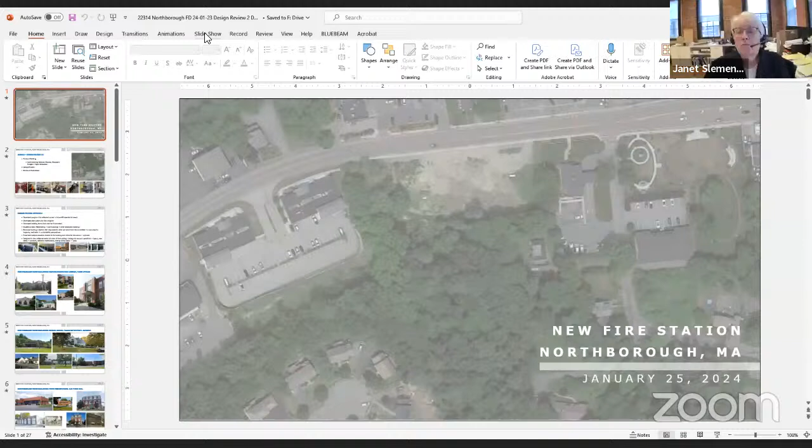Amy, you're muted. I'm sorry, can you hear me now? Yes, we can. Thanks. Okay. And you can see my screen, okay? Yes, okay, thanks.

Okay, so I'll try to go through this fast as I know you have a lot of comments that you wanted to get to. This was just sort of an agenda for the meeting. I'm just going to quickly go through where we are in the process, and then we can review the submission that we sent to you. The design approach that we've taken with the building committee, the first step we had was to develop a program.

We sent out detailed questionnaires to the fire department, and we had a number of firefighters respond, which was great and really gave us a lot of good data to work with as we developed the program.

We met with them, toured the station, and went in depth in our conversations about their operational needs, both for current firefighting and looking out 40 years to what they might expect they'd need. That was used to develop the program for the building.

From that, we developed several different plan options for how that program might be developed. We reviewed those with the department and the committee, talked about the pros and cons and what would meet operational needs, and wound up with the option we're going to show you today, which best met the operational needs for the fire department.

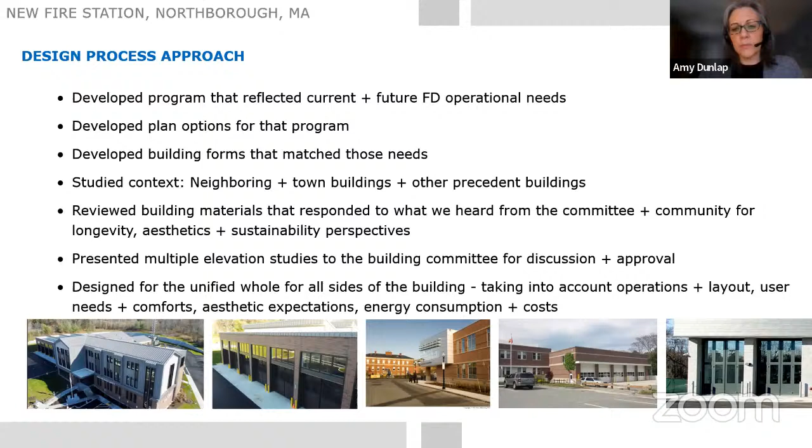When we design, we really try to design for a unified whole of the building. We look into all sides of the building. We don't just have a facade in front and then wrap the building with something else in the back. We want to make sure it's a unified design that represents the operational needs of the fire department, provides the comforts firefighters deserve, meets all aesthetic expectations, and contributes to the energy goals for the building.

These we looked at with the design review committee previously in the joint meeting. We looked at precedent studies for a number of buildings around the town.

The public buildings we looked at were the library, which has some beautiful old arches in the front and an addition in back that's a very sympathetic modern addition to the historic library. The town office building has some lovely Art Deco details with a curving canopy and light fixtures. Other town buildings we looked at include the schools.

I'm just going to grab my laser pointer so we can point to some things as we talk. Some gentle arching canopies, some semicircular arches in the police station. We looked at pitched roofs and flat roofs, all represented on buildings in your community. We looked at window patterns with large openings and smaller openings above them, and building trim dividing the window patterns, all as precedents as we developed our design.

Other town buildings we looked at were the existing and the old fire station and the old town hall building, and industrial and commercial buildings around town were other precedents we looked at.

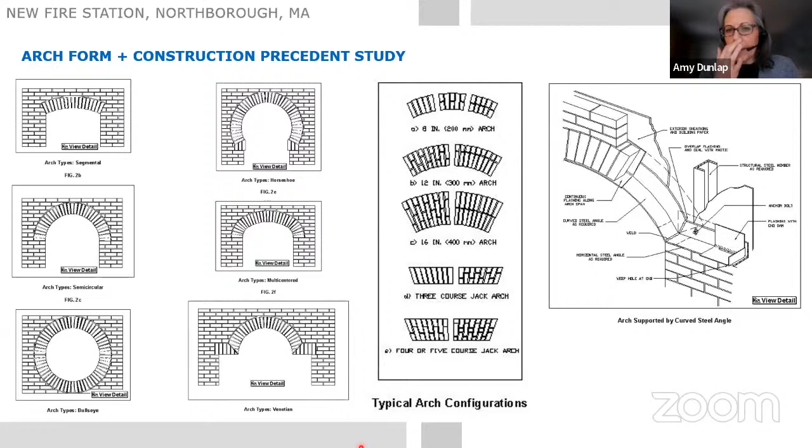As we started developing the design, there was a lot of interest in incorporating arches, both from the community and from the committee. We spent time looking at various arches and construction techniques and what that would mean for a building constructed the way we propose. We looked at segmental arches, semicircular arches, multi-centered arches, and lots of different arch types. We looked at how the construction would be accomplished with steel framing supporting the masonry and looked at different flashing methods, and we'll continue to do that as we move forward with the design.

When we presented the first round of designs to the committee and started looking at these masonry products and arches, there was a lot of discussion about H.H. Richardson, a prominent American architect in the 1800s. He was the architect of Trinity Church in Boston and did lots of public architecture throughout New England, including many libraries, just a few being Ames Library in North Easton, Winn Library in Woburn, and Converse Library in Malden.

There was a suggestion that we look at H.H. Richardson for inspiration. A lot of his buildings feature prominent arches marking the main entrance. So we looked at those, and he had other arches used to highlight other things. You can see semicircular arches at main entrances, and segmental grand arches shown in other places, as well as other arch designs he used. We looked at all of that for inspiration.

We looked at the way he used different masonry products, the way he used banding courses to tie together different elements of the building, and the way he used window patterns. The windows really reflect the functions going on beyond them, so it's not the same window pattern repeated across the building. Windows are grouped together and reflect what's happening in the spaces beyond and the functions back there, so you see small windows at the top of the building and larger windows depending on what's happening behind.

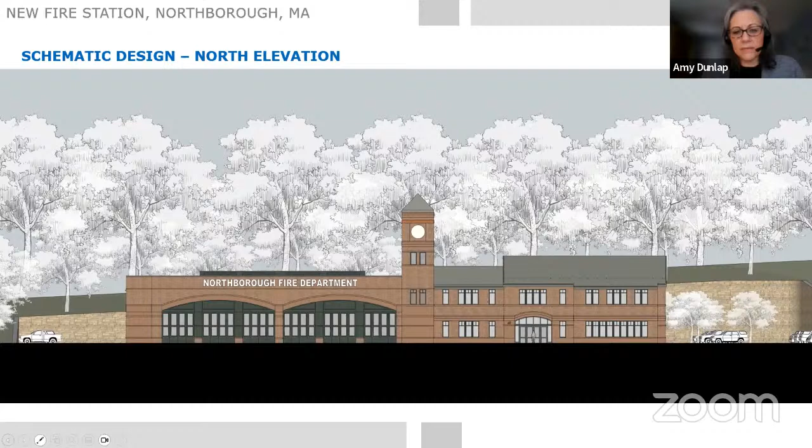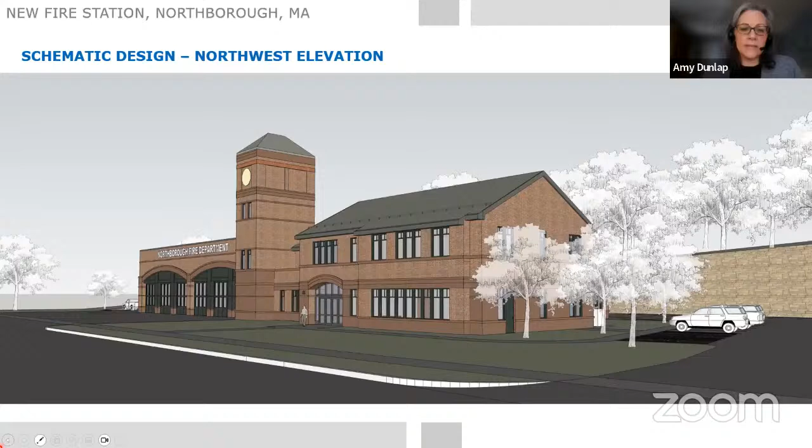We have pitched roofs over the administrative wing, and then we're proposing a flat roof over the apparatus bays with roof monitors. Pitched roof monitors would be over that flat roof. Those would have a vertical surface of glass that would allow natural light deep into the apparatus bays, and then the sloped roof surface could be used for solar panels.

This is the view of West Main Street with some of the neighboring building masses shown for reference. You can see the retaining wall behind the building and then the bank and other buildings around.

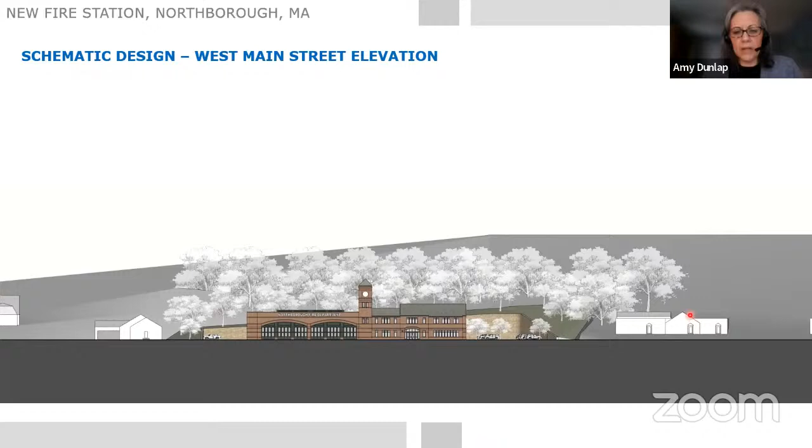For the south elevation, this is the elevation that faces the parking area. We continue the banding and the different masonry products. We continue the window patterns. For the apparatus bays, we were proposing not incorporating the arches on the back side of the building simply due to cost considerations, but that's something we can continue to discuss.

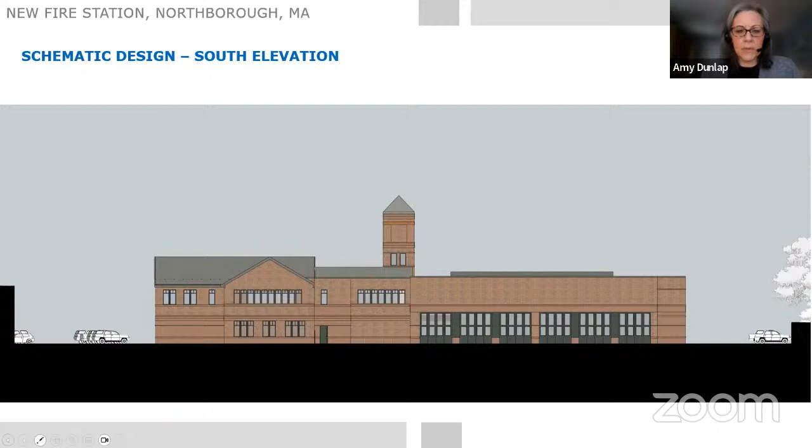So where we are in the process right now, our next meeting with the building committee is to approve the schematic design so that we can send that to a cost estimator. The cost estimate will then take several weeks to produce, and we hope to present a schematic cost estimate to the committee at the end of February.

We still have more design review meetings with you to continue and address any issues noted today. And then we'll need to be going to the zoning board and the planning board. And we have plans for an additional community information session moving forward.

That is the end of my presentation.

Thank you so much. That was great.

The way we go forth after this in our meetings is I'm going to reach out to staff. I know Lori, you sent out a letter yesterday with a checklist of about 15 items. Usually the applicant will look at those and decide if they want to follow them or ask for a waiver. Is there anything you'd like to mention, Lori, or they just got it so they can come back to us at the next meeting?

The only thing I'm curious about is actually two things. One is, could you point out on the schematic where the rooftop solar panels would be possible? And the second thing is, I know you mentioned the possibility of having some sort of vines cascading down from the retaining wall. Have you also given thought to maybe terracing at the highest point to break up the mass?

I'm going to address the second thing first, if that's okay. On the terracing, Nicole Capistran from PARG might also be able to respond to this, but I know she has been talking to the manufacturer of the segmental retaining wall about possibly terracing. One of the issues we're hearing from the manufacturer is that as you terrace, sometimes the height needs to actually increase in the wall, both because the grades are steeper as we go back into that hill, but also for structural reasons. So we are talking to them about the possibility and we're going to certainly look at it, but it's a question of whether the wall is going to get considerably taller if we do the terracing rather than just having the straight wall. Something we need to investigate more.

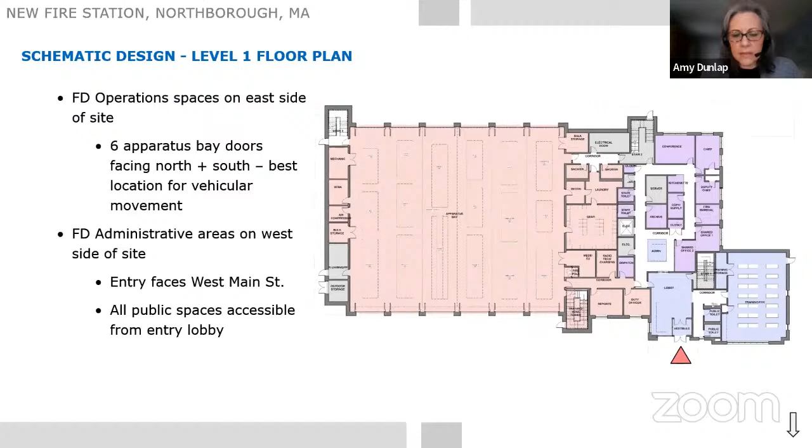For the solar panels, I don't have a roof plan here to show you, so I'm going to try to find the best image to give you a sense of what we're proposing. Right now, over the apparatus bays, there are 3 roof monitors, and each of those roof monitors has a sloped roof that faces south, so we were proposing putting solar panels there.

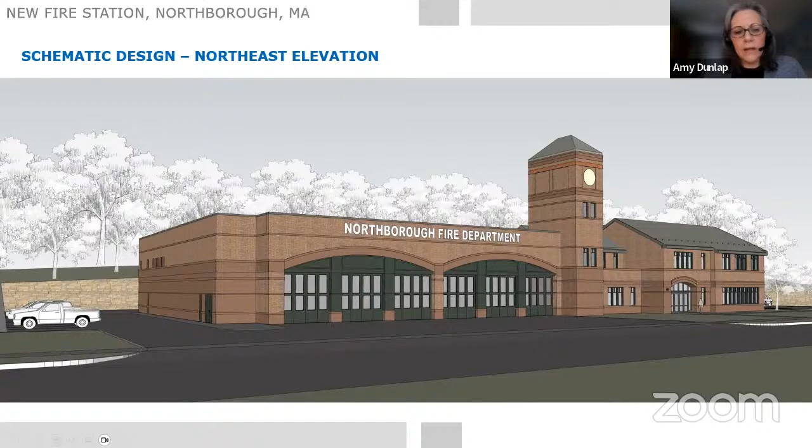The other opportunities for solar panels would be on the south face of the sloping roofs. Certainly, we could look at putting solar panels on this sloping roof.

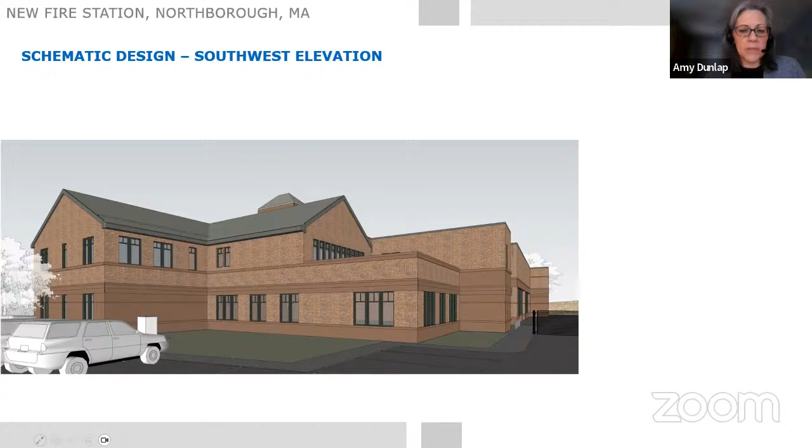We have not done a solar study yet, but we can do a solar study and really look at what would be the most effective locations, and whether it would be effective to put solar panels on this roof or on the opposite side. That's something that really needs to be done, but there are definitely opportunities for solar panels in various locations.

Amy, if you show the view looking from the east, you can actually see the monitors. I think you had it up before. There you go. Yep, right there. Thank you, okay, right there.

All right, thank you very much for the planning board submittal. Hopefully that will be firmed up a little bit more, and I would be curious as to what size solar installation you can accommodate on the roof.

And if you could actually put that in the context of the expected use of electricity for this particular property, so whether there would be like a net gain or a deficit between the expected use versus the power that will be generated. And of course, I understand it's seasonal and also depends upon the weather, but if you could base it on an annual basis, that would be helpful.

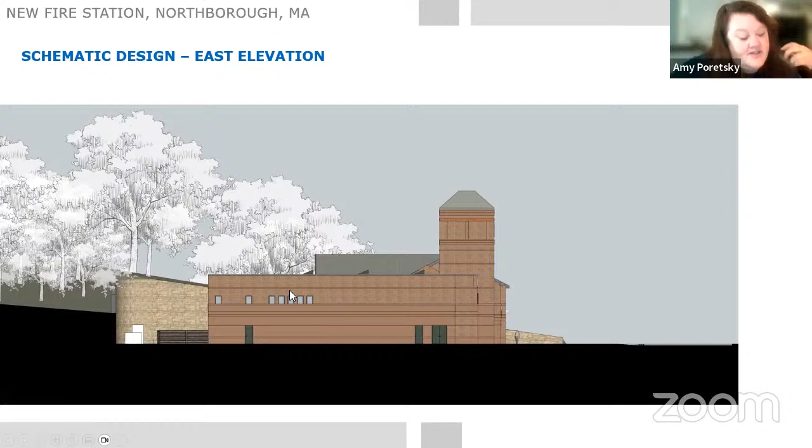Okay, thanks, Lori. I'm going to open it up to comments from the design review. While we have Dave, I was going to start with landscaping. And can you show the landscaping while you have your screen up?

Sure, I had some quick questions, so I hope you don't mind if I start.

Okay, what I noticed when looking at the site plan is the plantings shown along the border right there. All those plantings are within the swales, the drainage swales. So I was wondering what type of plantings you'd be using, because the trees and shrubs would block up the drainage swales.

We'll have that resolved for the next meeting. We will plant appropriate plants based on the hydrology of the site. This was just sort of a schematic to show that we're revegetating the area where there will be significant grading, so hopefully some of the plantings will be outside of the drainage swales.

Also, this has to do with the stormwater treatment area. Have you guys looked into that? Is that a retention basin, or what is that going to look like?

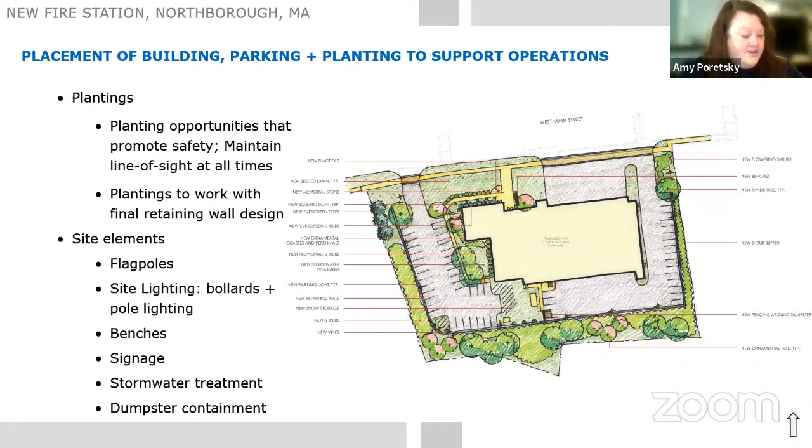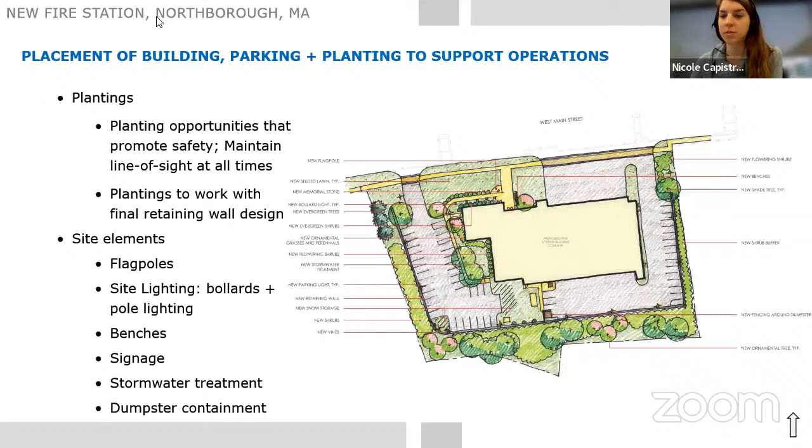All right, I'm going to start in with some of the site plan questions now that I had. Starting on page C300, the first page, there are two dark lines in the driveways near the street. Can you tell me what those lines represent? Just didn't know if they were setbacks, or for a crosswalk. Oh, they're crosswalks.

Yep, okay. Also, I understand they're schematic designs, but at the next meeting we get a plan that shows dimensions of the buildings - width, depth, height. I guess there was some elevations, but nothing about the width and depth of the building. And I can see the east setback is 57 feet, but there was no number for the west side setback.

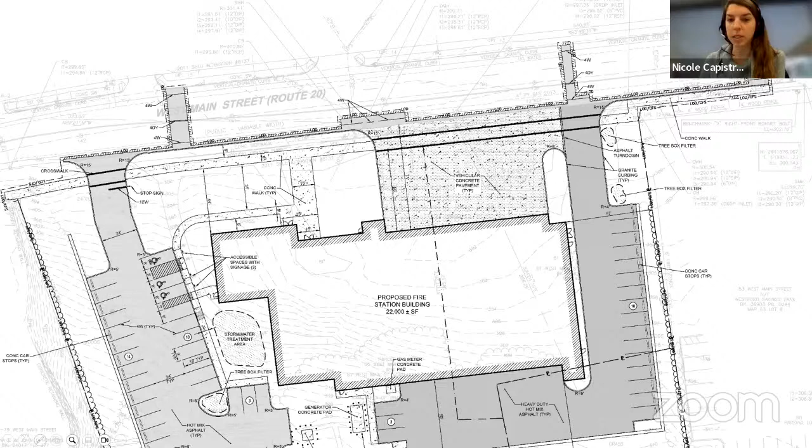How far back is the apparatus bay from the street? I'm not sure if you can zoom in, Amy, but it's 71 feet from the edge of pavement. The property line is further in from the existing, so that's where you're getting that 56-foot setback from the property line, and that 71-foot setback is from the edge of pavement.

Yeah, I saw those numbers, I was just curious where the numbers were from. And the width of the building, that's about 230 feet - is that what you guys had said before? Marc, do you have that? I think that was about right.

Give me one minute here.

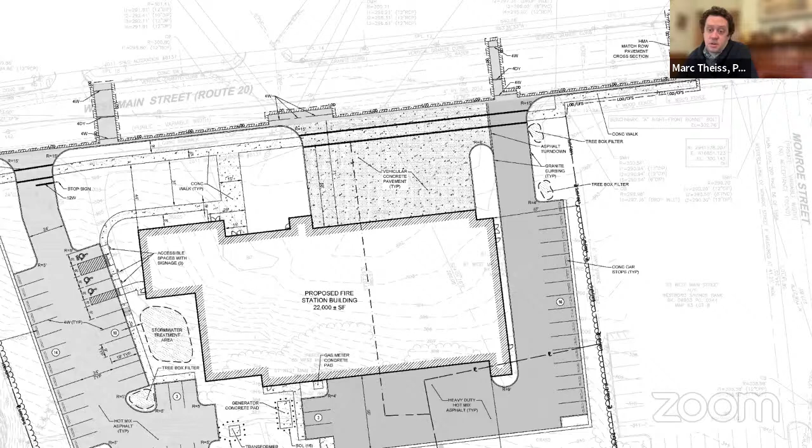Yeah, from our site plan, I'm seeing about 230, approximately 230 feet long. Okay, so the width is pretty long.

With the confines and size of the site, I really thought the 2-story or 3-story building where they built up was a good way to do the building. But I understand that the building committee has favored this 1-story with the second floor for the dormitory.

With that 1-story, does that leave less room for expansion? Because now you're surrounded by a wall. And say they ever wanted to expand to add a police, public safety type building, or any type of expansion, you're pretty much going to be held to this footprint with the wall around the outside.

Yeah, so when we looked at the design of the building, we looked 40 years out. Those were the conversations we had with the fire department. They looked at their projected staffing and equipment and operations, and we designed the building to accommodate those operations looking 40 years out. We didn't have conversations about adding a police station onto the building in the future. That really wasn't part of our discussion.

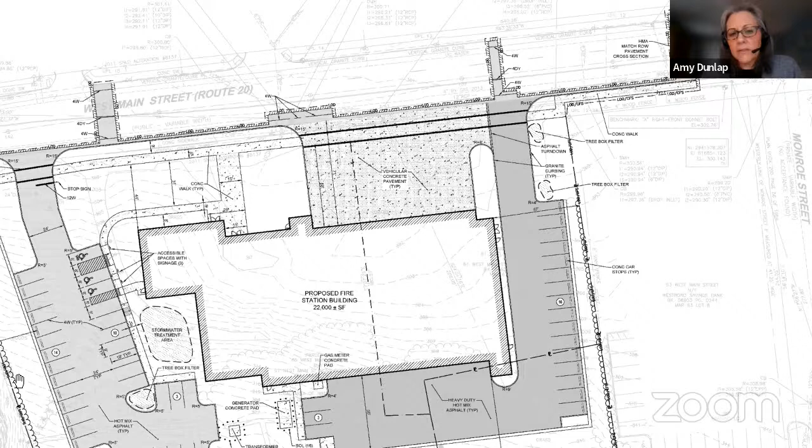Even with the 3-story scheme, I don't think you would have room to add on without building up into the hillside. So there could be the possibility of building a second building up into the hillside, but we have not looked at that.

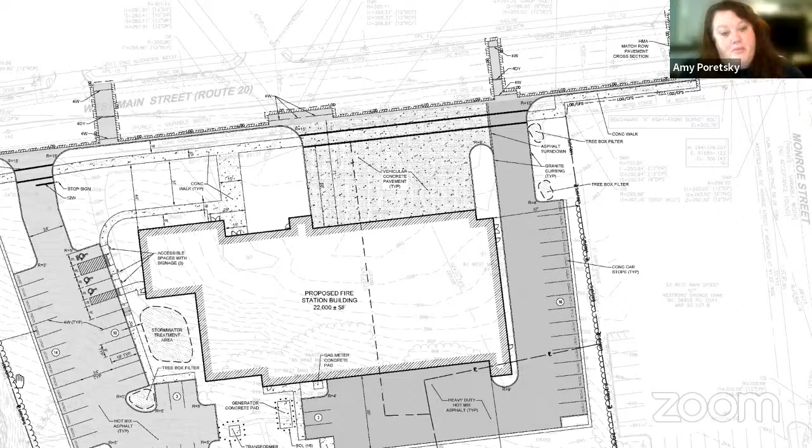Okay, well 3 people so far have mentioned moving the training room into a lower level, not below the apparatus bay, but below the admin side of the building. Is that something that would be possible to try to save space on the west side of the building, which would give more room for snow storage and also might be able to move the parking and save wall space on the back?

I can speak to that from an operations point of view. Putting a training room below ground is not really optimal. Now you're in a training room with no windows. You have egress issues. If we have 75 people in there, now we have to set up a second way of egress. It really does not benefit us or the community to bury that.

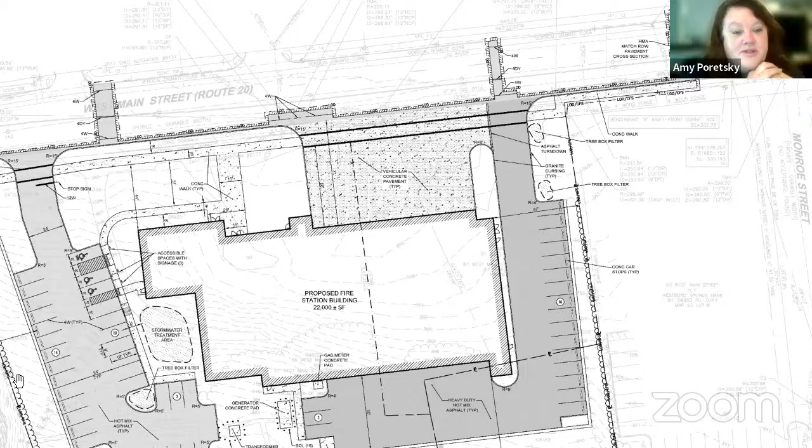No, there are a lot of community training rooms and conference rooms, so I didn't know how much this was really going to be used for the community. If the fire station is going to be well over $600 per square foot, I would think this would be based on fire station needs mostly. I don't know, I think you guys were talking about FEMA and MEMA, and a lot of times they have bunkers, so I didn't know if it made sense to put some of it on the lower level to try to save room on this space.

Yeah, it's an interesting comment. MEMA actually does have a bunker in Framingham, and they have tried numerous times to get out of that bunker and make it just a regular building up and out. They haven't had any luck with that.

So I see Bob had his hand raised. I don't know if he had a comment about the basement.

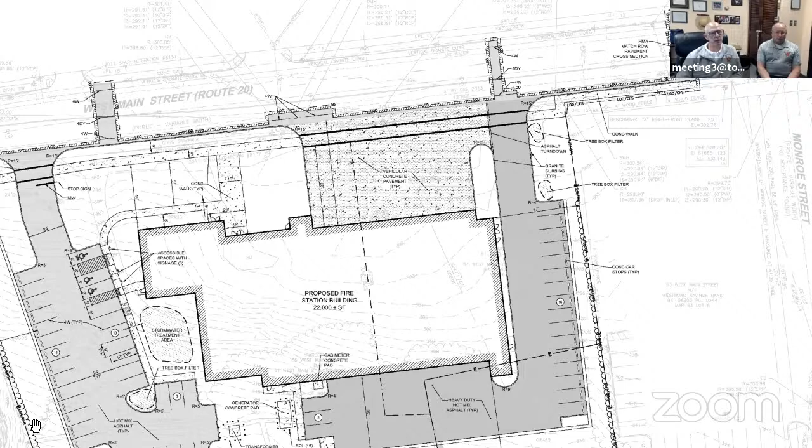Yeah, if I could, Amy. One of the things, aside from operational standpoints, if you go subgrade, you have to make that handicapped accessible. So you're increasing costs with at least one additional stairway, and the elevator has to go all the way to the bottom.

Just a side note, when Grafton built their fire station, I was vice chairman of the building committee at that point. The question arose about the training room or conference room - how often does that get used? It gets used all the time, and also by scouts and things like that. One of the things Grafton does is in the event of a big emergency where the emergency director has to start running the town, that room is key to providing space for all the other people and components that need to operate the town in the event of a disaster.

And you want that at grade level. In addition, your HVAC going underground is going to create issues as well, both in terms of heating and cooling, but also in terms of dehumidification and mold. You really want to keep the water out of there.

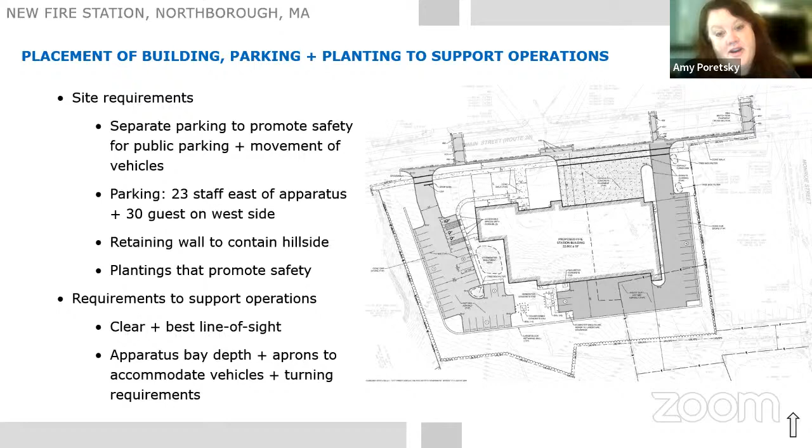Also, the parking lot before wasn't going around the back. So the parking lot right now for the public ended, and now it's wrapping around the back, which also is taking up space and pushing the wall back. I just wanted to note that. I had thought if the training room went underneath and the parking lot in the back went away, then you would have less of a need for a wall.

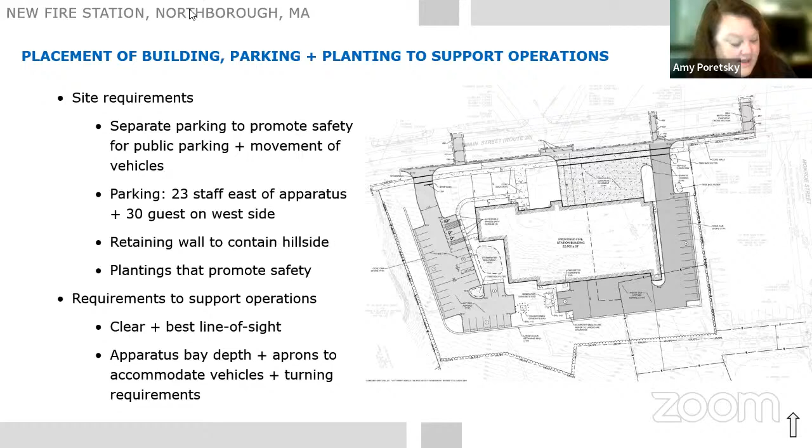Also, one other thing - would you look at Kalwall versus the roof monitors? Kalwall could be more affordable and might not have as many areas where it can leak. It's been used for a lot of years, and I actually have a picture. I could share my screen if people don't know what Kalwall is. Do you mind stopping sharing and I'll show a picture? Sure.

Okay. Let me just get it to the right page. Okay, so Kalwall, can everybody see my screen?

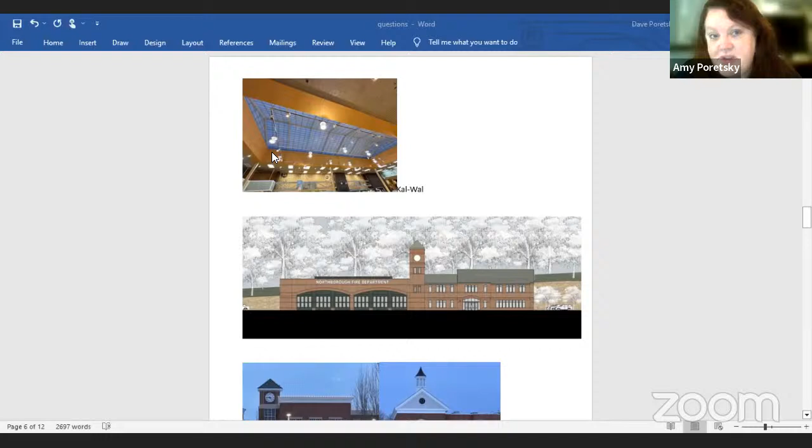Yes, so Kalwall is like a really big skylight. This is Roche Bros. in Westborough. Next time you go to Roche Bros. in Westborough, look up when you're in the vegetable section - their whole roof there is made out of Kalwall, and it lets the lighting in. I didn't know if that would be something they would be looking at along with the roof monitors, because it sounds like the roof monitors have to be built specifically for the building, and there might be more chances for maintenance issues.

Yeah, we are looking at different glazing products right now for the roof monitors. We don't tend to use Kalwall, honestly. Kalwall is a brand name, it's a fiberglass panel product. A lot of the fiberglass panel products do have issues over time with yellowing and really decreasing the amount of natural light that gets into the space over time.

One of the challenges we have with a public building under Massachusetts public bid laws is that we have to have three equal products that we specify for every product we incorporate into the building. So it's one of the challenges as we look at both the retaining wall and something like this - we can't say we're going to use this one particular product. We have to make sure there are other products we can specify that would be just as acceptable for the building. There are polycarbonate glazing systems we have used in this application before, which are very similar.

They create the diffuse light you see, similar to what you're showing with Kalwall here. They're also a very durable product and offer high insulation values, so we're looking at all of that right now. We have a new energy code in Massachusetts, so any products we put into the building have to contribute to the overall energy efficiency in order to meet the requirements of the energy code. All of that's what we're investigating right now as we move through schematic design. Okay, thank you.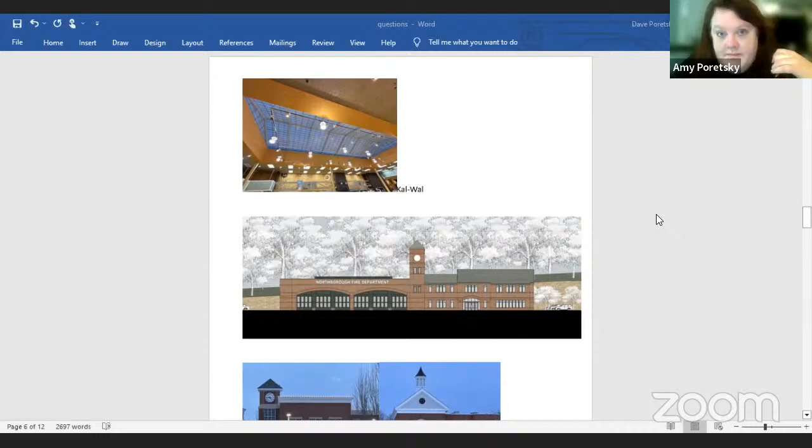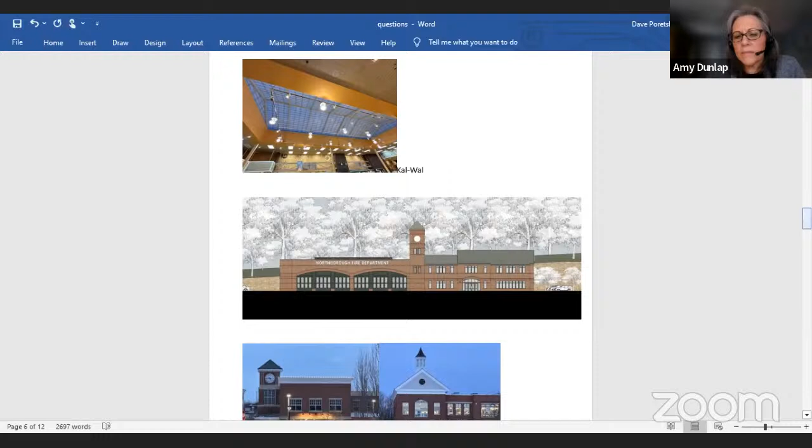In my opinion, I would keep it the same as the brick, because that wall there - the way we're looking at the picture now, it looks like those doors are set back, but they're not, right? That's all the same facade, the same scale on the front. No, the intent is to set them back some. We have not detailed that yet and figured out exactly how it's going to be constructed, so the plan doesn't reflect the setback, but the intent is for those to be set back a little.

This is a picture I had shared. I would still like to go back and see the 6 arches. I feel it looks more classic. The 2 arches is more of a contemporary look, an expression of the arches, and here there's no green, black materials. I feel it's a more classic look to keep the brick, and I like the red doors. I know people have said it's busy, but Natick has 5, and this is another one with red doors and 5 arches.

I think there's a way you could do it with the arches, and I'd stay away from the green black material. Actually, when I was looking up the landscape architect, it came up with his location on Google, and here's a building across the street from his office. Look, there's like 24 arches on that building.

So I just feel the arches could still be done. I'd like to know if at the next meeting you could bring up an example of what it would look like. Here's one you had brought before, with the brick and the arches. I still think it's a great, classic look for the downtown. This is a chance, this is going to be the showcase building in the new downtown, and it'd be great to have a nice classic look.

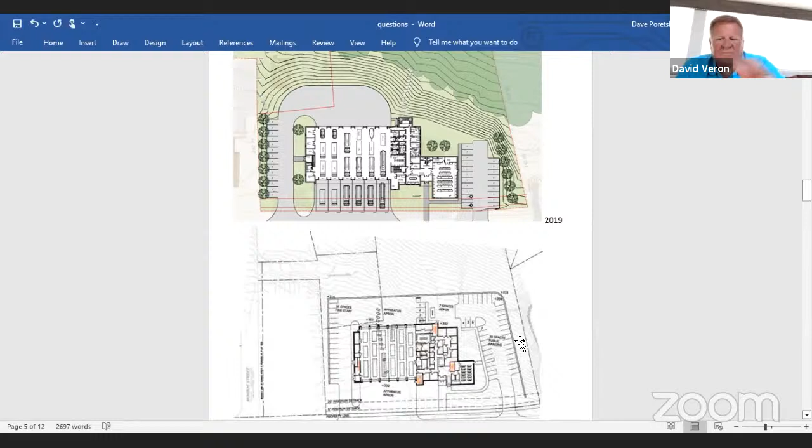I still think you can keep what you have for parking and just kind of play with the wall and how it's being played with a little bit. Just kind of play with it.

As the chief said, there was no site survey done in 2019. They were just looking - we weren't the architects at that time. I don't know exactly what they were looking at, but I imagine they were looking at GIS, which doesn't have the most accurate data sometimes. So we got a site survey, and the grades were a little different than what was expected. We did some more in-depth programming, looked at constructability and all, and that's how the footprint changed and the parking layout and the wall design changed.

So it's just, as the chief said, a different point in time with different levels of information that were available. I think if that design had progressed, and once they had discovered or completed site survey work, they would have discovered that there was an issue and that they probably would have ended up with a retaining wall as well. The building grew though, like I said before, like 4,000 square feet too.

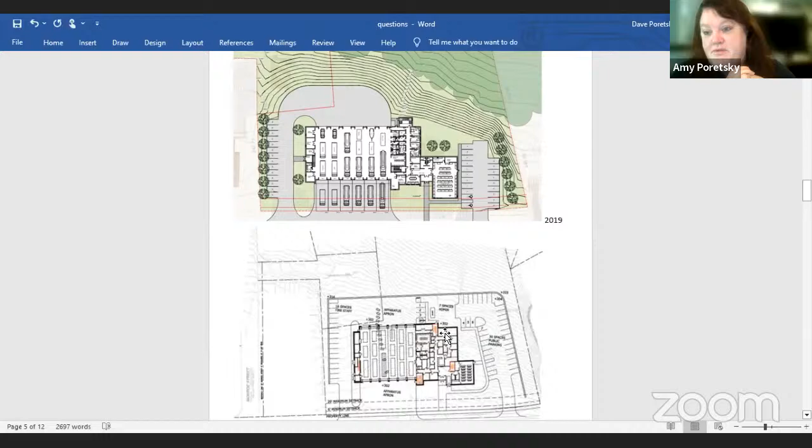The internal workings, I have no problem with whatever you need for that type of functionality of your building. But I do think the outside is important, and the way that it looks is important. And I want to see it from an elevation where I want to see the plantings coming out from the front door. I want to see how this is all going to actually look next to the two buildings next to it, next to the bank and next to Hillside. I don't want a photograph of the bank by itself or the building or the 73 by itself.

Again, it doesn't help the viewer to understand where this is, how big this is, and where it sits in the neighborhood. And that's one of the things that design review does do is how this is in relationship to the neighborhood. It's not its own spot - it's in a long line of buildings coming into this town area. It's a really big undertaking, and it's going to be here for a very long time. And I think that it bears a lot of discussion.

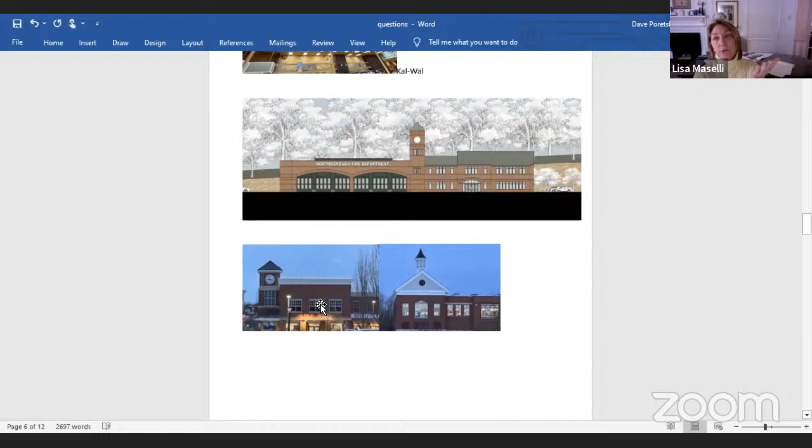I don't know if it's concrete. That to me has a little less... modern. The word is hard to define. When we're looking at this drawing that you have, it's hard because it's just a schematic. It doesn't really give us any dimension or depth so that we know how it's going to look.

I don't know how to better describe it, but there are many windows that we've seen. If we come down a little bit through Amy, where Hudson is - do you have the screen, Amy? I don't have Hudson, I do have it in my phone, but not that.

If you're looking, here's Natick, right here where your pointer is. So maybe you don't have as many windows in the repetitiveness as they had, and that little arch above it in the center, an arch around it, takes a little bit of that modern look away, because of the way the banding is done.

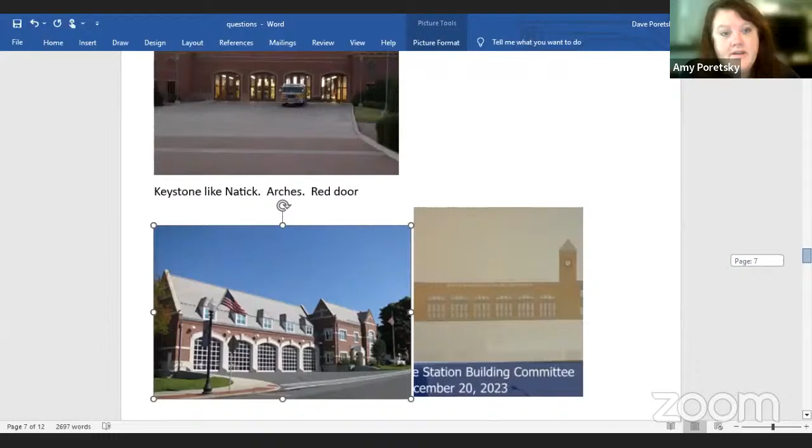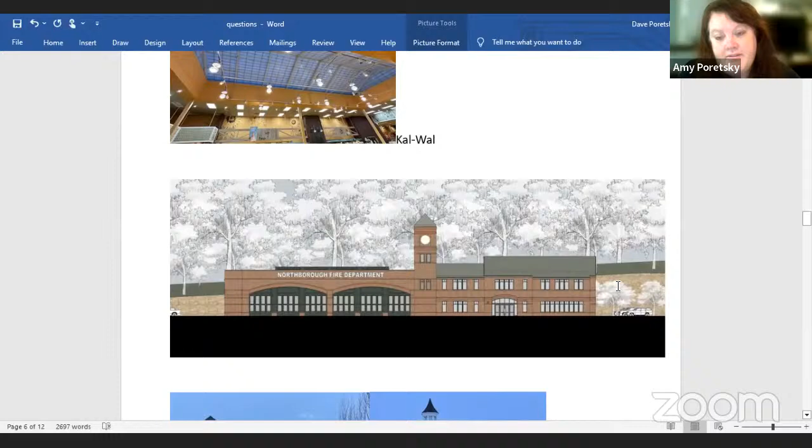That to me is a much more classic look. Is that helpful? No, that doesn't look... yeah. So maybe different treatments around the windows. Like this is, like you said, a narrow, tall window, looks like there might be a black rain band around it.

It's missing a pop of color. It's like a lack of positive and negative space. This treatment, it's just around it, not popping. Right, because that's why you need the light - the cornice in white, or the light colored cement. It's so bland.

I'm wondering if part of the problem is the materiality. I think these are very conceptual schematic elevations. They're not representative of final materials. We try to use rather neutral tones early on.

So you're not necessarily seeing - we're talking about different materials, but you're not necessarily seeing a contrast in what these different materials might look like. And perhaps that's causing some of the feeling that it's flat, and causing some of these comments.

I think because when I look at the banding that you're pointing to, we do have some of that banding in our building, but it's not shown in this rendering as a high contrast. And so maybe it's just getting misinterpreted.

As I look at the building you have at the bottom of that screen, the photograph on the right-hand side, I see three windows under a precast lintel that are rectangular with two smaller panes above, which is exactly what we have in our design. So the only difference I see between those two is color - red brick and a light lintel - versus what we're showing, which is just sort of a neutral brick color over the entire facade right now.

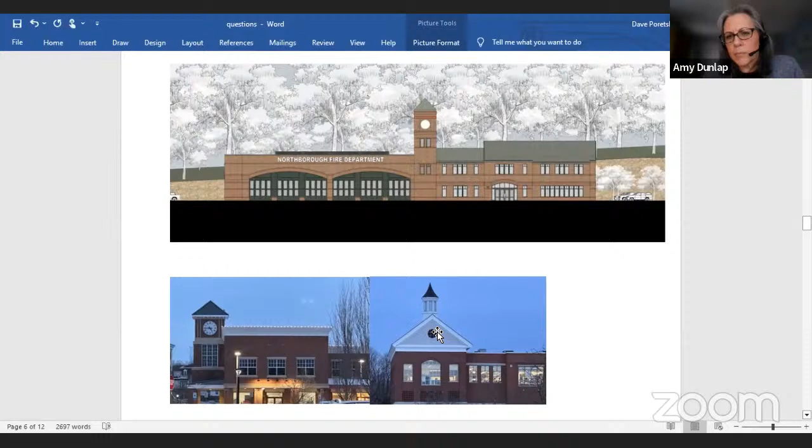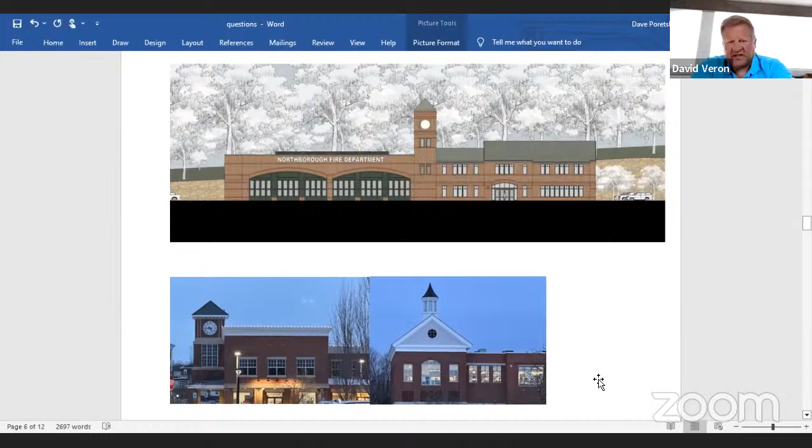So we can certainly look at some of the color options and the materiality and see if that helps convey the ideas a little better in the elevations. Usually in renderings, when it's in person, they'll show here's the material details; when it's on Zoom, here's this color, here's that, here's a section elevation like you have here - but here's a clock tower blown up, here's more detail on it, here's the material in more detail. Let it show through, let it pop in more detail.

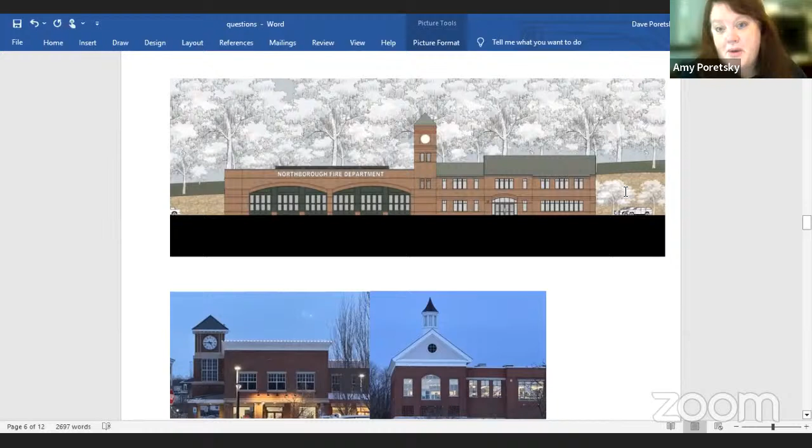Not popping. I agree, this looks contemporary too. But I see Bob has his hand up. Yeah, I do. Thank you, Amy.

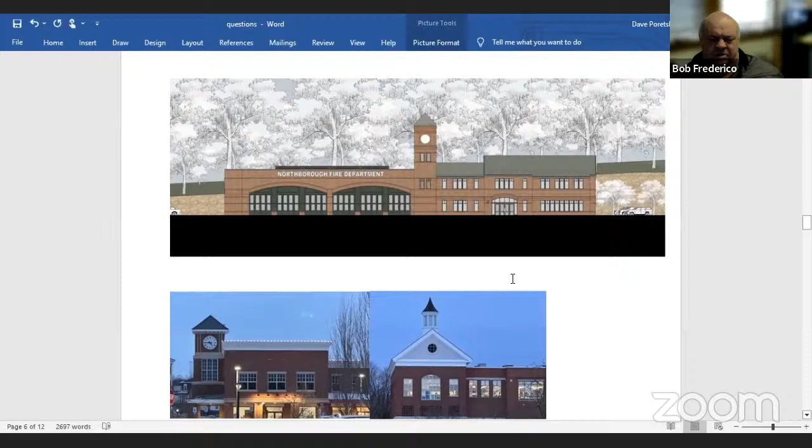One of the things to remember when you're talking about windows, there's a certain amount of glazing that is required in any type of building. So you've got to watch for that. And also with the energy code, the windows have to be energy efficient. As Amy, our architect, has said before, we're currently under a new energy code that started for commercial uses back on July 1st.

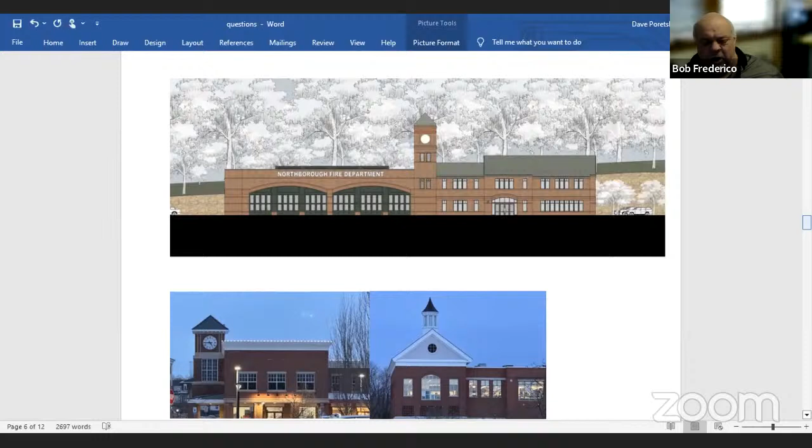And there's supposed to be another edition coming out from the ICC, and also further changes coming up probably next July. We don't know quite what those changes are going to be. So you've got to keep windows in the back of your mind where they're required, but they also have to meet certain requirements through the energy code. I just wanted to make you aware of that.

Thanks. Well, I agree with that, but I don't think the facades of the building really have to do with the energy codes of the windows - it's how the windows are placed in the building and what's around them.

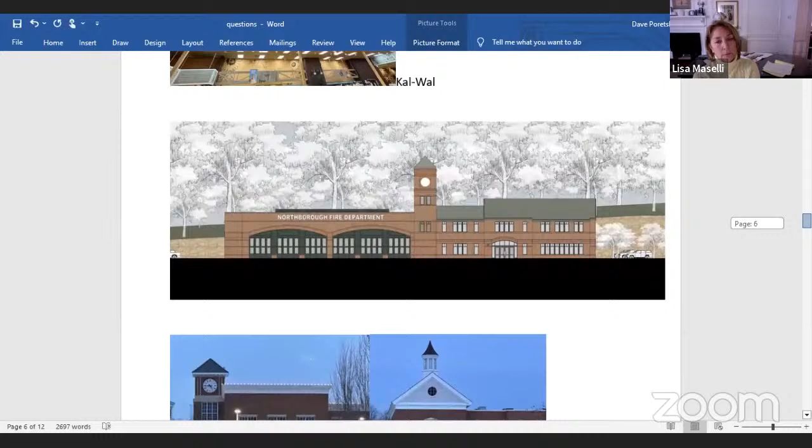The windows need to be placed according to the interior plans because it goes by room. Yes, but what I'm talking about is how they're decorated. Decoration isn't in the building code.

Right, okay, it's now 10 o'clock. I might open it up for some public comments if you guys are okay with that. Yes, the only issue I have is...

I see that there are 5 attendees, but I can only see one name, so I don't know if the chief or anyone else who's co-host can see the names. I actually can't see anyone, I only see one person's name, but I can see at the top it says there are 5 attendees. So if someone's raising their hand, I can't tell, and I don't know why. That's more of a I-have-no-Zoom-idea thing. There are 1, 2, 3, 4, 5 attendees, and I don't see any hands raised.

Amy, I have, again with the chief, I've got 5 attendees, I have their names, but I don't see any hands raised aside from mine, I think. Oh great, okay, I can see the number 5, but I can only see one name. I don't know why. They're all hiding from me.

The attendees include 2 members of the Fire Station Building Committee and 3 members of the Fire Department. Okay, but no one has their hand raised. I don't see anybody, okay, so there are no public comments.

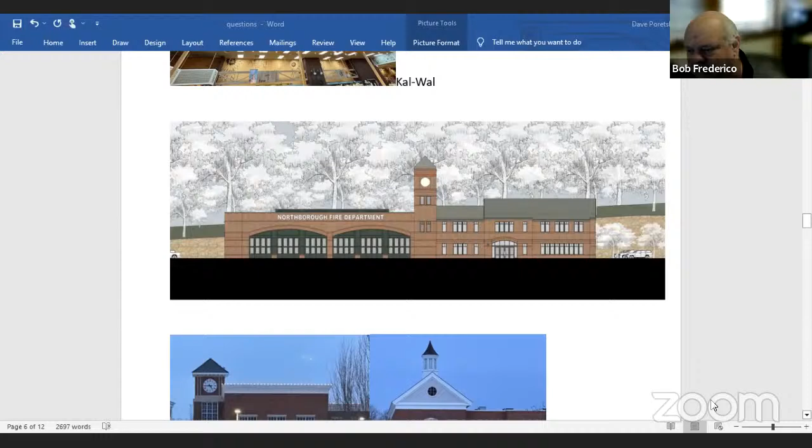I had just a couple of things, basically for the architects. As you know, under the energy code, for the electric charging stations, you're gonna have to identify where those are going, with the proper proportions, and also as required by the building code, you're gonna have to designate a section of the roof that is going to be solar ready. I'm sure you guys already know, you have a whole team of experts, so I'm just throwing that out there in case somebody has a question. Thank you. Thank you. Yes.